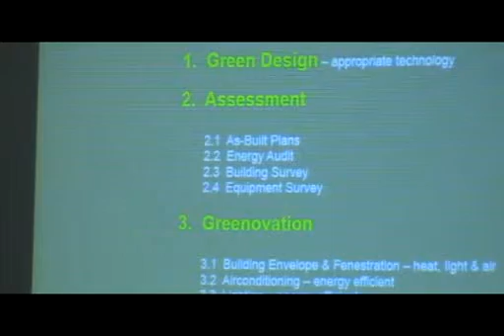Then in greenovation, we talked about these 6 items. First, building envelope and fenestration. We talked about heat, blocking it off, letting light in, and controlling the air coming in and out. And we also talked a little bit about universal design.

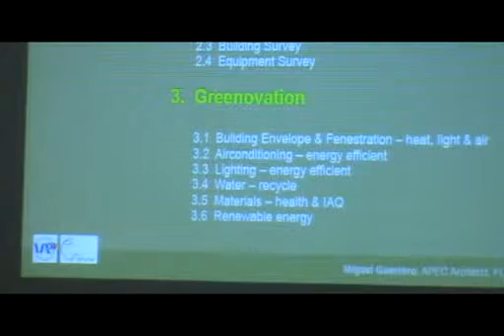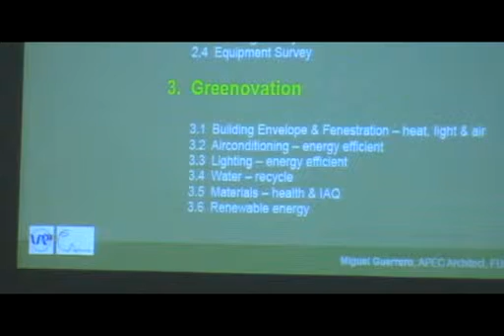Look at air conditioning, the most important aspect of power consumption in a building. Let's see if we can make it energy efficient, from simple plain maintenance all the way up to maybe looking at more efficient systems. Lighting, to look at it more efficiently. At the same time, remember zoning: if possible, rewire things so that you turn on the lights farthest away from the window separately from those beside the window.

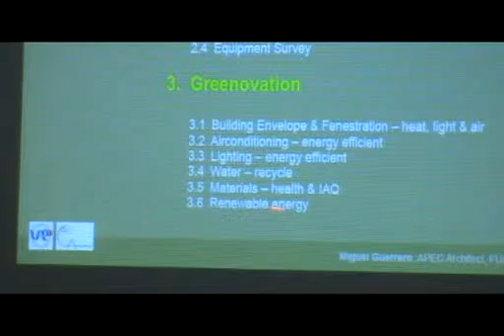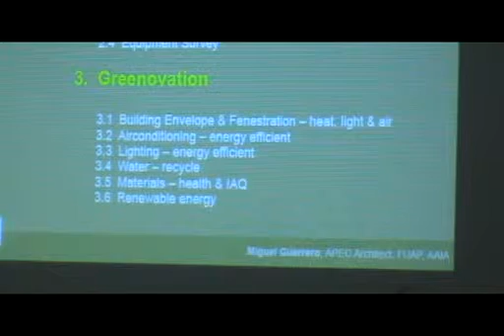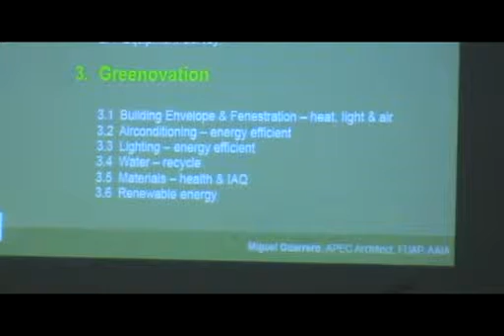If possible, recycle water. Materials, make sure that you use healthy materials and you maintain a good indoor air quality. And then look at renewable energy. Every day, as Architect Garcia mentioned earlier, there's something new in this field and costs are going down. So be aware of it, know how solar systems work, so at least you can prepare your building for it. Because then maybe the next time you do retrofitting, you can consider these other renewable energy sources.

Joke time, so that you're not so bored, is the LEED guy. So these are 2 architects. The LEED guy says, I've got good news and bad news. What's the good news? Your building is very green. It earned the highest possible LEED rating, called Platinum. And the bad news, the building is still ugly.

You know, with all the green building rating systems, there's no points for beauty. So sometimes, in the effort of people trying to come up with a green building, that part is forgotten. Hey, look at my building, with some antennas sticking out, some air ducts, and some trees growing out of every single corner in the building. Wow. So anyway, something to think about. Energy efficiency is good, but we are architects. Let's also make sure that we have a very pleasant environment.

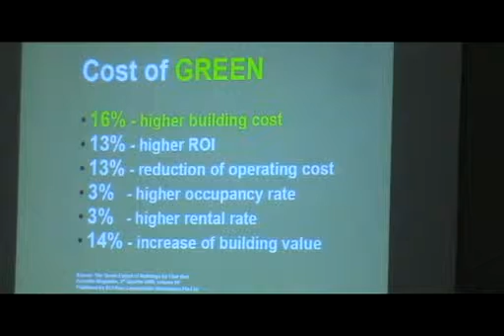The question earlier on the cost of green. A 2008 survey of Asia: what is in general the cost of green? 16% higher than a normal building. This is all over Asia, which includes technologies like solar panels and all these high-end things. But in exchange for that, 13% higher ROI, 13% reduction of operating cost, 3% higher occupancy rate, 3% higher rental rate, and 14% increase of building value. So, admittedly, it is a little bit more expensive than a normal building, but returns are much greater, and you will offset that cost in its operation.

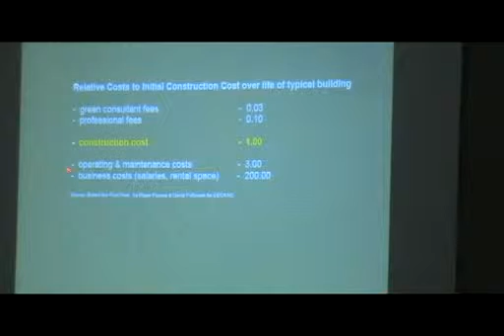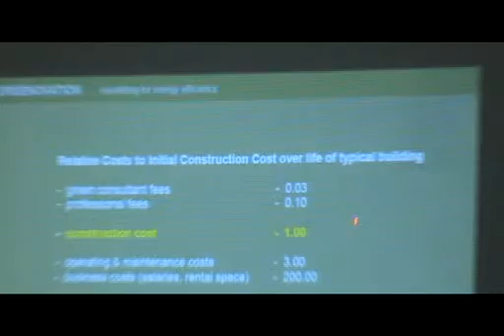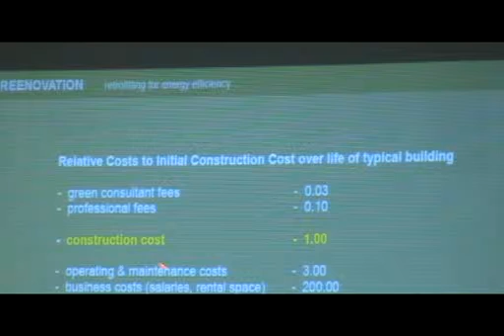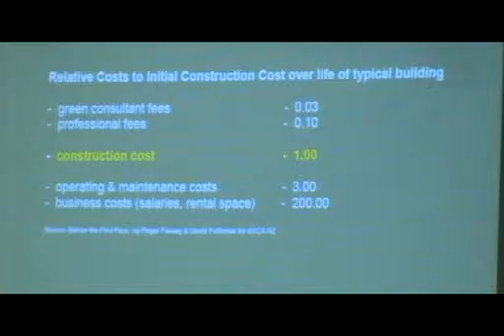For example, in terms of construction cost, I don't like to show this slide too much because I was going to say it's good to hire a green consultant. But really, if your construction cost is given as 1, an architect will charge you maybe 10% of that for design fees. Maybe a green consultant will charge you about 3% of that. But compared to the operating and maintenance cost, 3 to 200 times more than the building, because the building lasts very long, it might be worth it, no? So when you're starting your building, either a brand new building or retrofitting, look into these green angles already, because they save you a lot in this area.

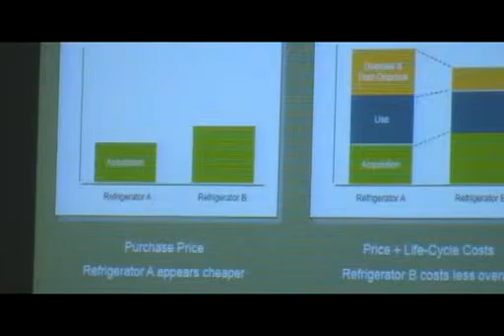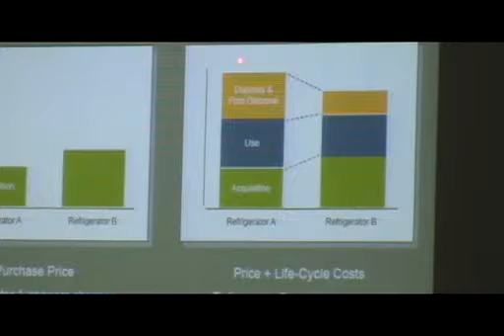Now a little bit about initial cost. Look at this: refrigerator A and B. Refrigerator A, your initial purchase cost is lower than refrigerator B. But its cost of usage is much higher, and its disposal is much higher compared to refrigerator B. B may cost more initially, but it's cheaper to operate and cheaper to dispose of. So that's what green buildings are all about.

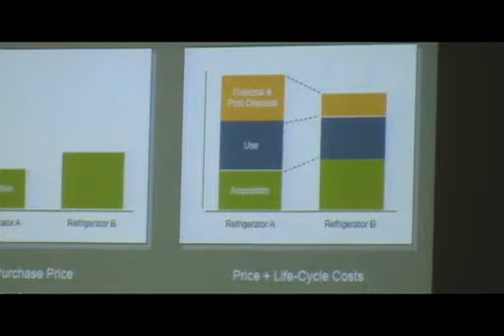It's not looking at the initial or capital cost alone. It's looking at the initial cost inclusive of the operational cost, and seeing that in the long run, you win, you make more money. Either you, your tenant, or your client. So in the end, I'd like to end with this question. Can we afford to go green? I mentioned earlier 16% more. But then, you can recover.

But nowadays, I think this should not be the question. I think this is the better question: can we afford not to go green? Can we afford to be left behind by the bandwagon of going green? Can we afford not to absorb all of these things so that we can prepare a better future for our children, which ultimately was the original definition of sustainability. Meaning, we are borrowing the world from our children, so we use enough resources for us to survive, while making sure that the generations after us, our children and our children's children, can survive in the same world, utilizing equivalent resources for their sustainability.